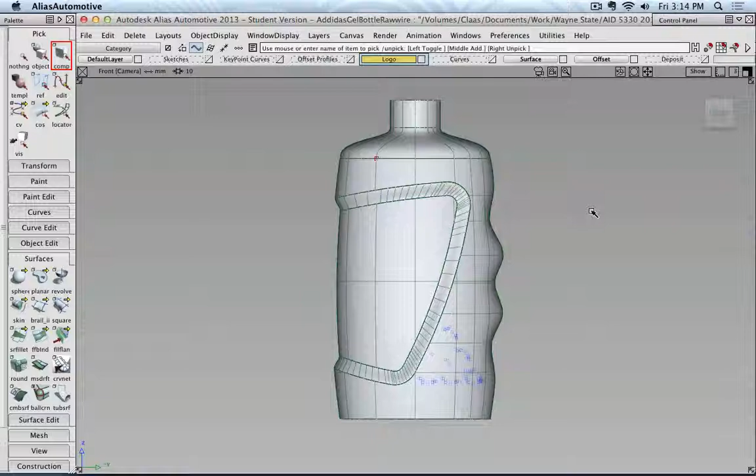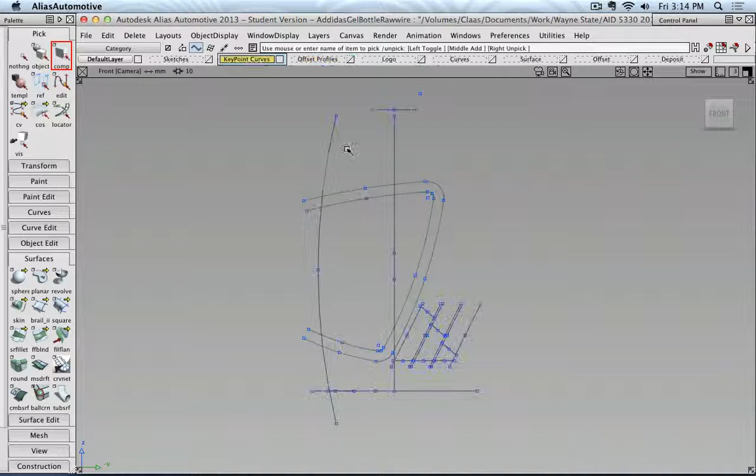So let's take a look at how we can create the emboss surface for the logo. Just as a reminder, the way I created the logo curves is basically the same way I created the offset curves. I had a set of key point lines, which I filleted together, and once they were all filleted, I created the offset curves for the inside.

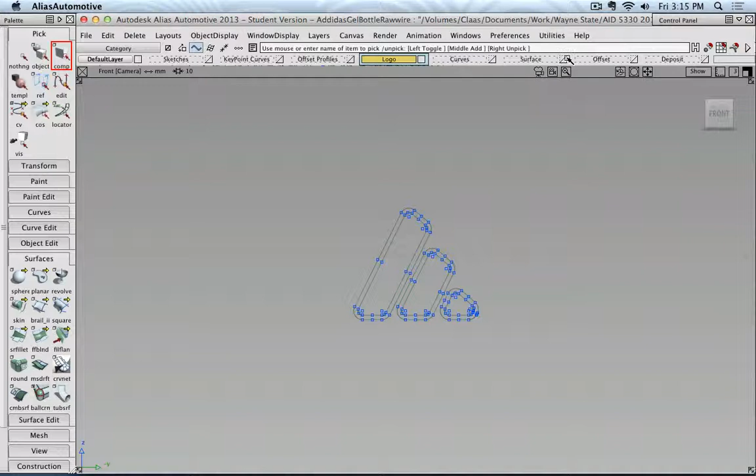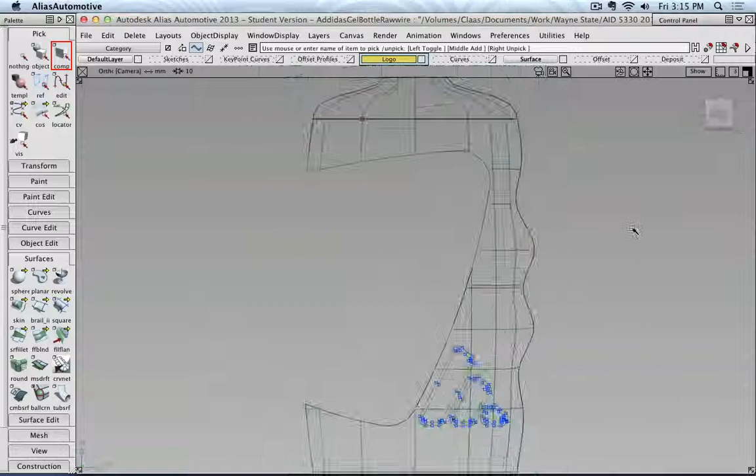So how are we now projecting those curves onto this bottle and creating a surface that is not inside but outside? We are making a model that sits on top of the surface. There are two ways to do this, and I'm going to apply nearly the same approach as before.

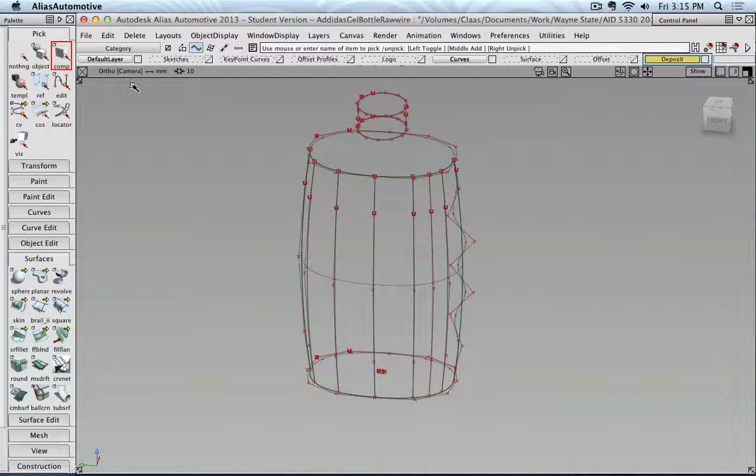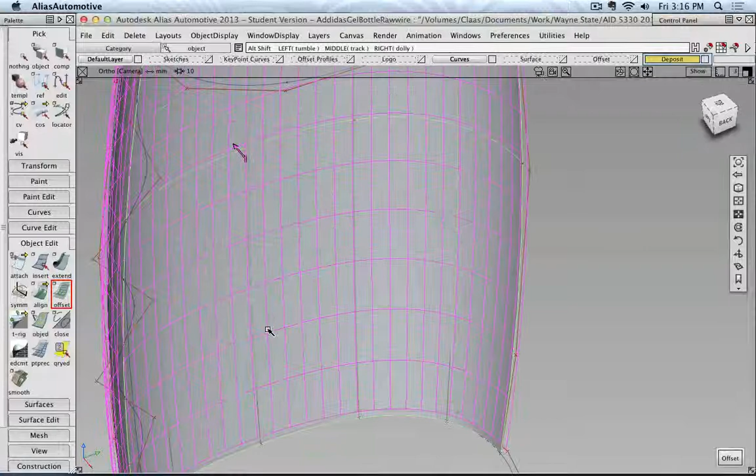I'm creating this on this layer. So the surface, I'm going to select for a moment here, my old initial surface. This surface I'm going to offset again, but this time to the outside. Let's zoom in a little bit. I don't want it too far because the logo shouldn't be raised too much on the surface, so something like this visually seems good for me.

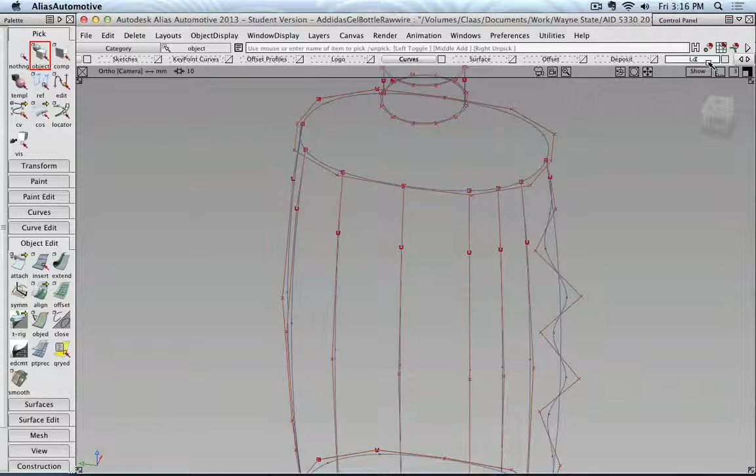Okay, and click offset. I'm going to create a new layer. Let's call this one logo surface, and then the outer offset surface I'm going to assign to that layer.

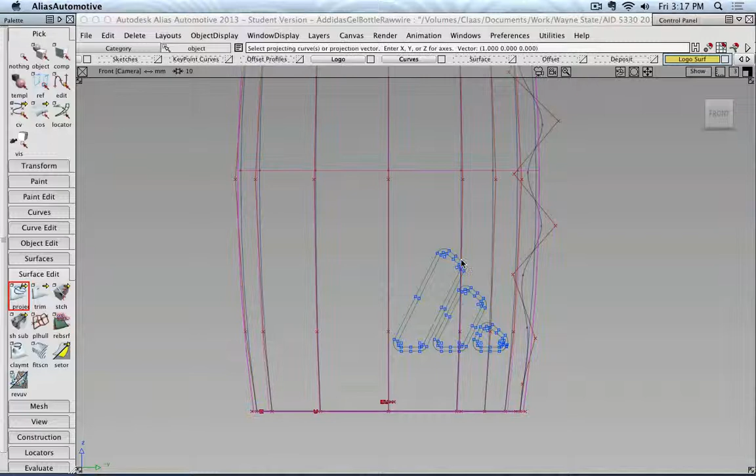Then in a side view, with my logo curves turned on or visible, I'm going to project the inner part of those curves onto that surface. To do this, we go to project, select our surface, press spacebar, and then I can zoom in and draw carefully a selection around the different profiles and curves, trying not to hit any curve that is part of the outside definition.

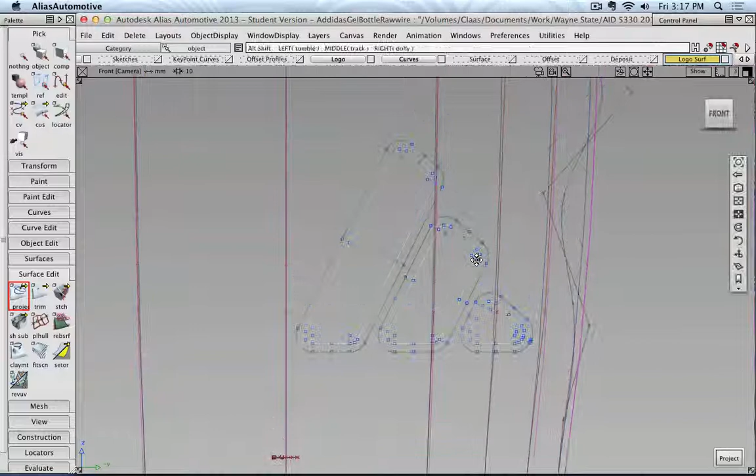Let's double click it and make sure, yeah, x-axis, that is fine. And then I say project. Now you see we have those profiles projected as trim curves onto that surface.

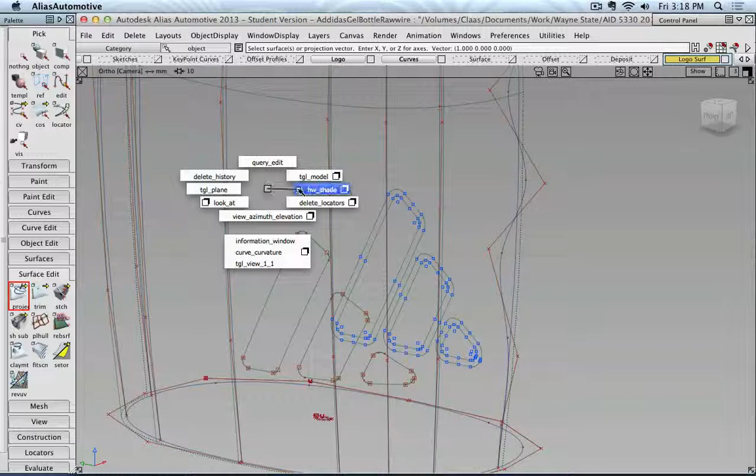And then we can go ahead, trim, and say keep this surface, and that one, and that one, and remove the rest. Here again, the Alias tutorial had this logo split across two different surfaces, and later on we have to create the blend surfaces between those in the main bottle.

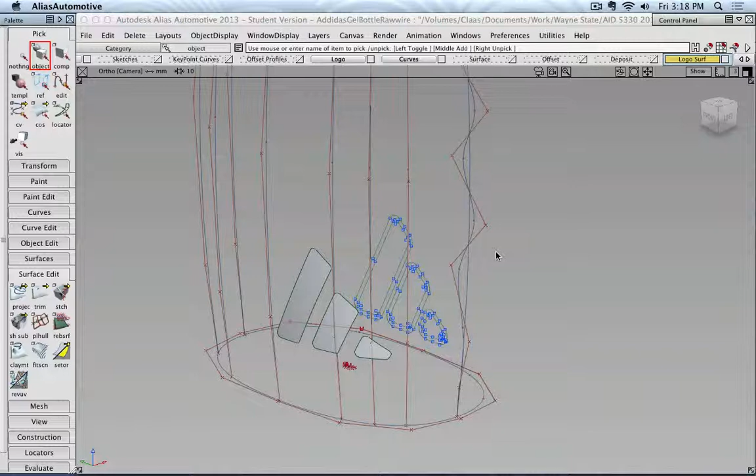It's a really good breeding ground for modeling headaches, something you want to prevent. So single surfaces.

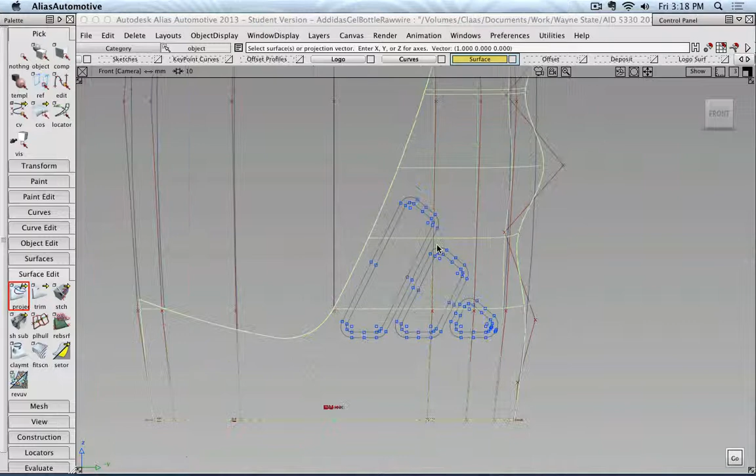Then I'm going to hide my logo surface because I have to project now the outer profiles onto my real body for my bottle. So I select the surface, select project, press spacebar, and as you can see, I'm just selecting the outer curves.

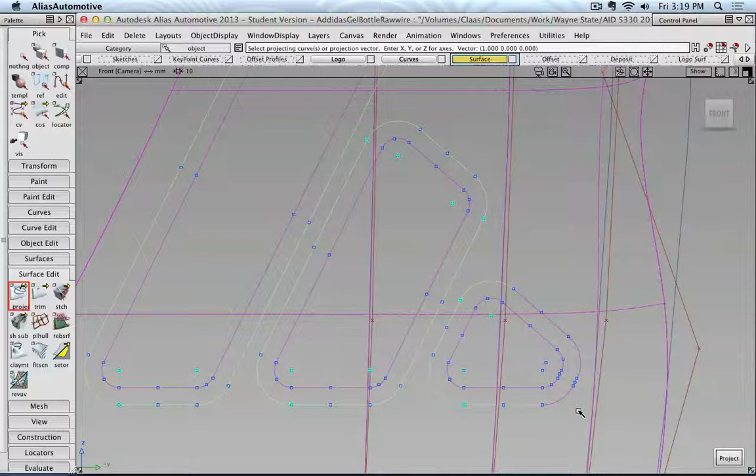Make really sure that you select all curves. For example, here you see there's a very small line in between, so don't forget it. And then project.

And this time, those surfaces we can simply discard. So I click discard, and it's gone.

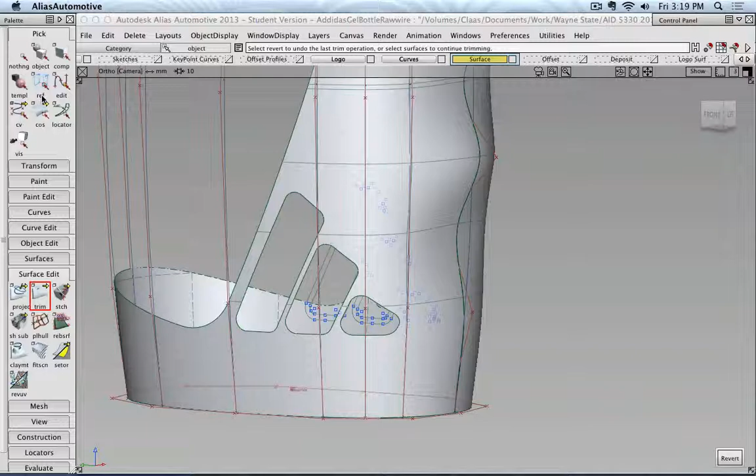So let's hide those curves. And let's say hi to your best friend, the Command S. Never forget to save on a regular basis because Alias sometimes crashes unintendedly and then you have to restart.

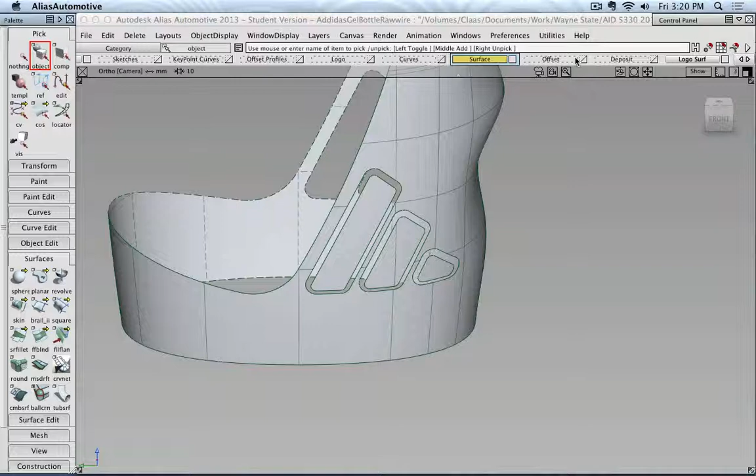And like what we did with the surface offset and then the blend, we again use the freeform blend tool. I'm going to set this one to G0 for a moment, and I have chain select still activated.

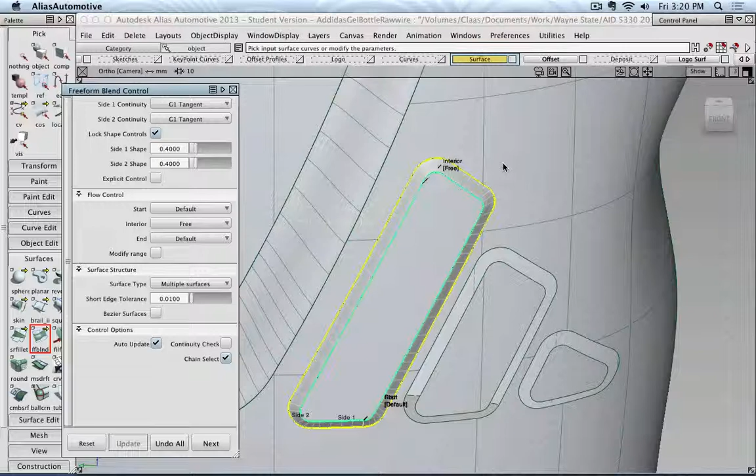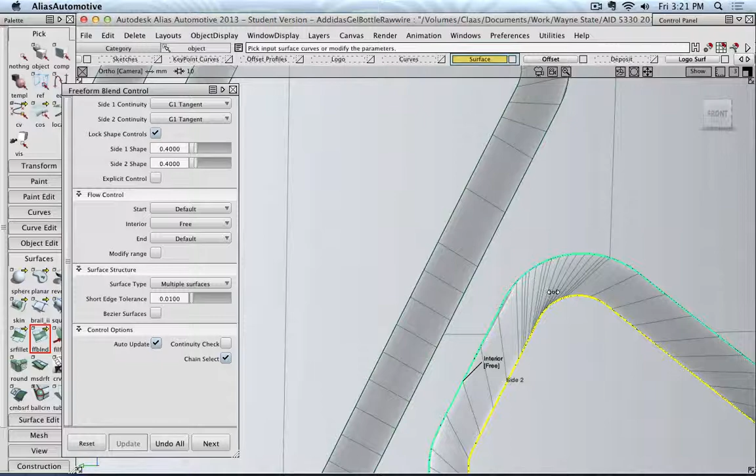And then I'm going to create my blend surface between those two geometry parts. Something here is a little bit complicated. You see the geometry here is kind of even, kind of like those lines are perpendicular to the edges, but just here this concerns me a little bit because this line goes from here to this edge.

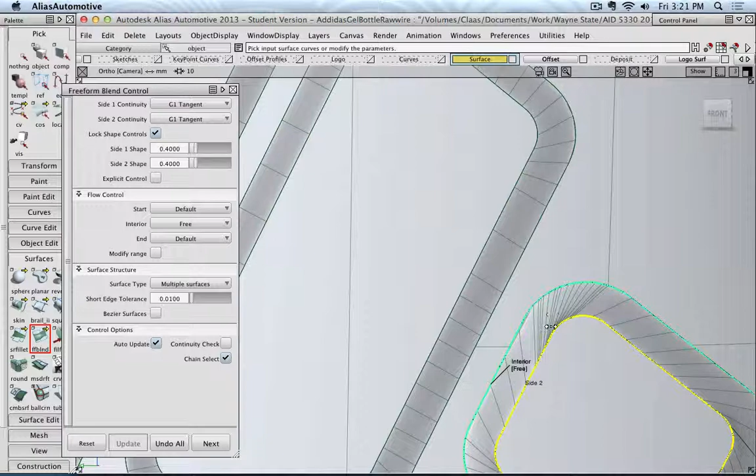It would be nicer if those lines would simply go the way how I'm moving my mouse tool. So I'm going to turn off the wire mode and try to take a look at how this surface might look from here.

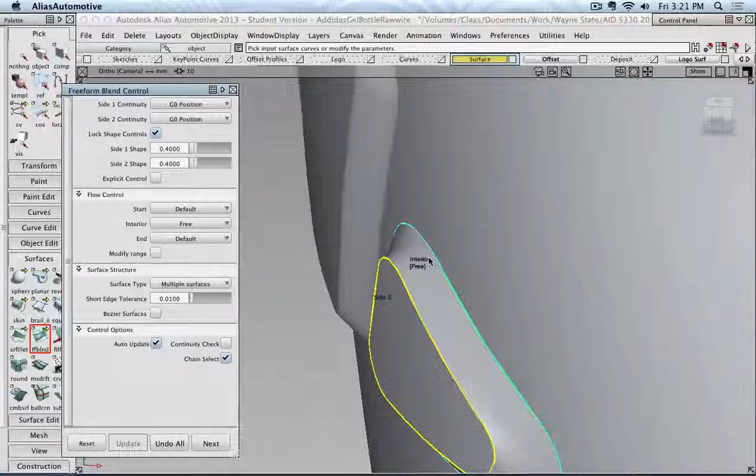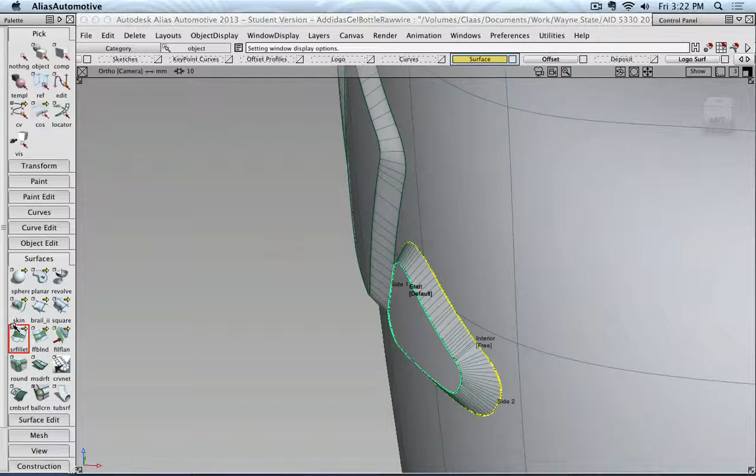Okay, undo, let's redo this command. Yeah, okay. So this time the surface seems to... oh, see? It got rebuilt in a much better way because it was really twisted.

So maybe just go one after one and then exit the tool and go to the next one, instead of what I did, trying to work while the tool is activated on all the surfaces.

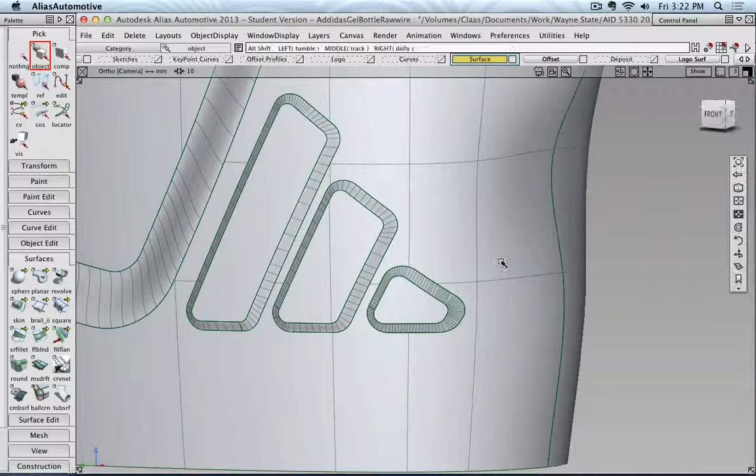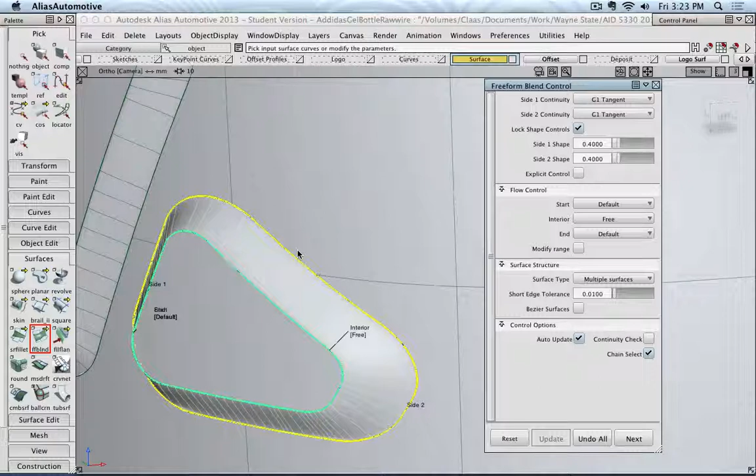And now I would like to set the curvature. So with the surface selected, I can go back and double click my freeform tool because, as you can see, it pulls up the construction history, and then I can go ahead and say G1 and G1, or maybe G2 in this case. This is really small and tight, so that might be an issue for it.

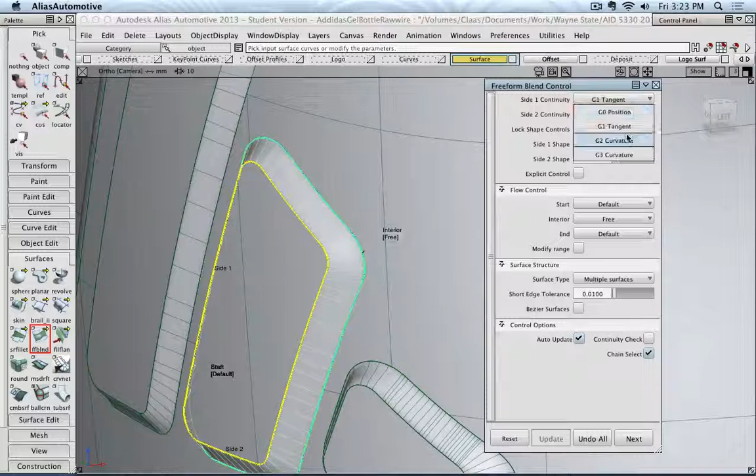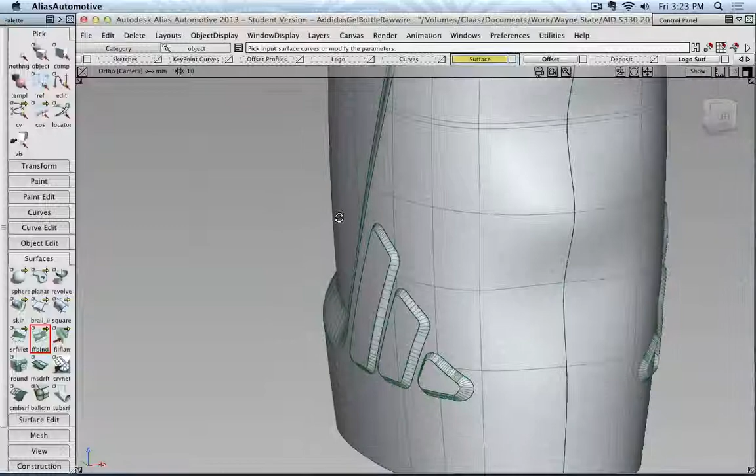And I'm actually going to do the same here as well. Okay, so everything is blended perfectly together. This looks quite good.